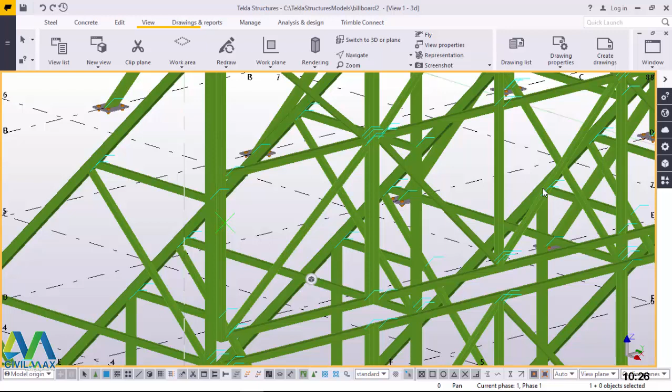Let me first of all highlight the canvas steel frame I'm talking about. This is what I'm talking about. This is what will be holding the advertising billboard.

Let me just select that. That's it, and this is what I'm talking about also. These are the canvas steel frames that will be held by these main supports, these ones here. I'll select that and bring it close so you can have a look.

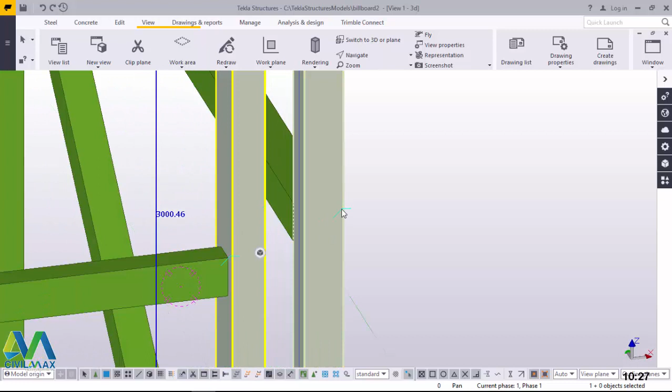So the connection we want to create, we want to create a connection between these two frames, so that this canvas steel frame can be held in place firmly, and to hold that message strongly to the people passing around any other billboard, so that they get the message from the advertising agency.

Now let me just turn this around so that we start creating the connection, connecting our steel frame to its main support. We'll get started right here, and I'll go straight to steel, click on steel, then come to beam, click on beam. Then I want to start creating my cleat, some sort of cleat here, and I'll go all the way to this part and snap on that spot.

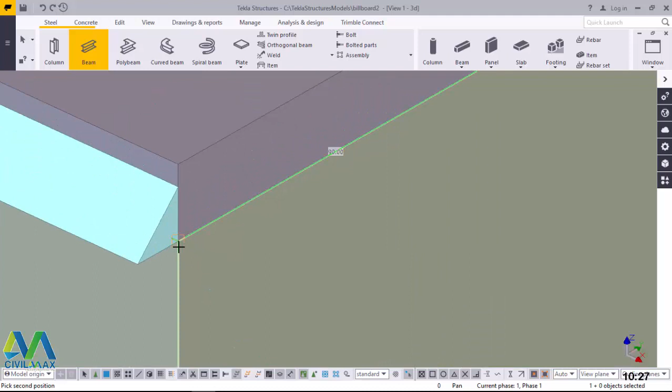Then right click and click interrupt to exit that command. Now I'll double click on this once again. I want to rotate it so that it sits well, so that it can also be welded properly against this member. Now to rotate it, I'll just come to this part.

Let me just scroll down and scroll up. I'll come straight here under position, then I'll click rotation, then I'll pick on back and click modify. That is not the best rotation that you want. I will click below and click modify. That's the position we want, but it's not the perfect way to do it.

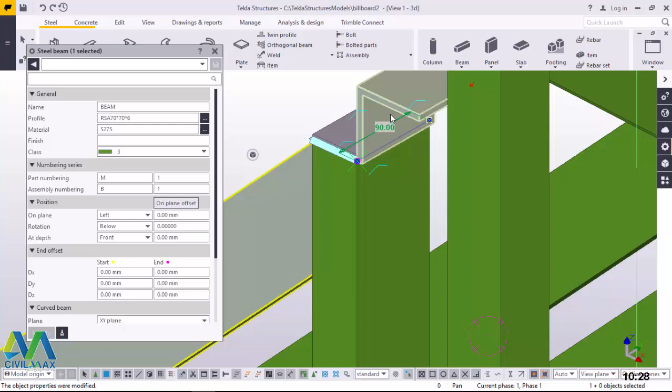Now I want to bring it slightly down, and to bring it down, I'll come to at depth and click behind here and click modify. That's it, it has moved to the position that you wanted it to move.

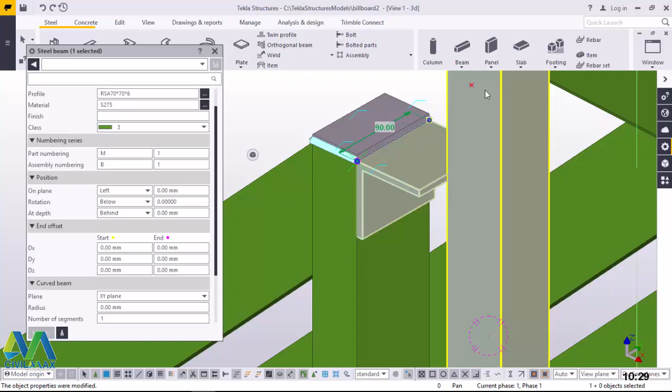Now again, I'll scroll because I want a bit of extension going this side, 50 millimeter, and the other way is 50 millimeter. To do that, I'll come to end offset. I want to offset this end by 50, and the other end also by 50, and I'll click modify. There's an extension there about 50 millimeter.

Then I'll click on empty screen to deselect that part. Then I'll press Control while holding my middle button on the mouse, and turn this model around.

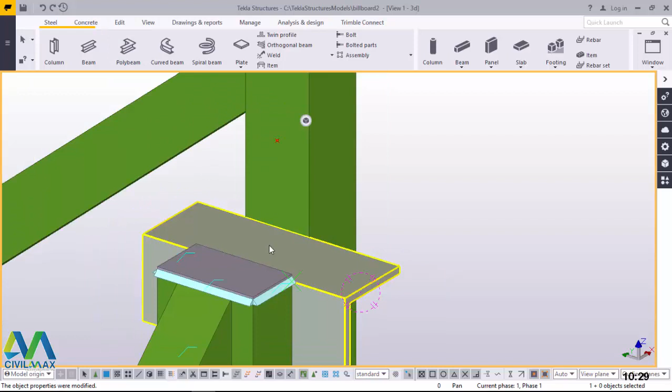Now we want to create another cleat here that will be moving all the way from this point to this point, and that cleat will be welded to this steel frame, and this one will be welded to this support, so that when you bring this, the canvas frame will just place it over here and bolt it.

I'll come back to steel beam, and I want to use this point all the way from that spot and go all the way to that end. That's it. And first of all, I've not shown you the size of this RSA.

Or angled profile. Now let me just turn this so that I double click on this and have a look at it. The size of this member is RSA 70 by 70, 6 millimeter thick.

I'll close that, and if you want to go back to profile catalog, just click on this radio button, and this will take you to profile catalog, and you'll be able to pick the appropriate one, or you can change this to another steel profile.

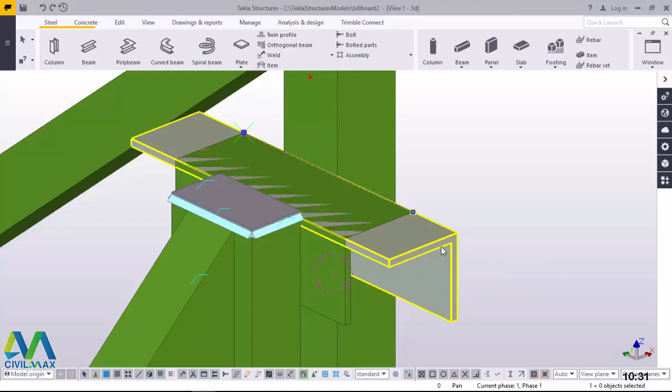Now I'll close that, and if you take a look, we have unnecessary extension of 50 here, and to rectify this, just double click on this and come all the way here and get rid of this. We just get rid of this and click modify, and once again it's not in the best position that we want it to be, so we'll move it slightly up.

I'll rotate it, and to do that we come here under position. Under position we'll work with these options: on plane, rotation, and at depth. Now we'll start with the rotation.

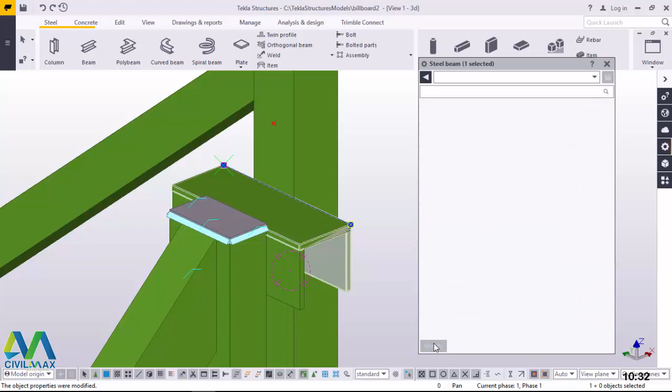I'll pick rotation and click back and click rotate, and that is not the best position. I'll click top and see how it locates itself. Not the best. I'll just come here and click below and click that. We are back where we were.

Now we'll just play with this until you get it to the right position. This is the best, slightly below the point that we are targeting it to be on. Now to bring it up here, we'll come to at depth and pick front and click right there.

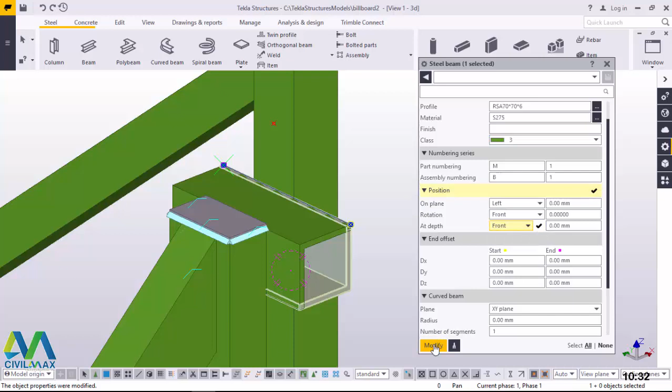There we are, it has moved up. Click on empty screen to deselect that part. Now I want to turn it around. I'll press Control while holding my middle button on the mouse and move my mouse like this. You can see I can rotate this comfortably.

What I want to do next is place my bolts. I want to connect this cleat to this cleat. This cleat will be welded to this canvas steel frame, and this cleat will be welded to this main support of the canvas steel frame.

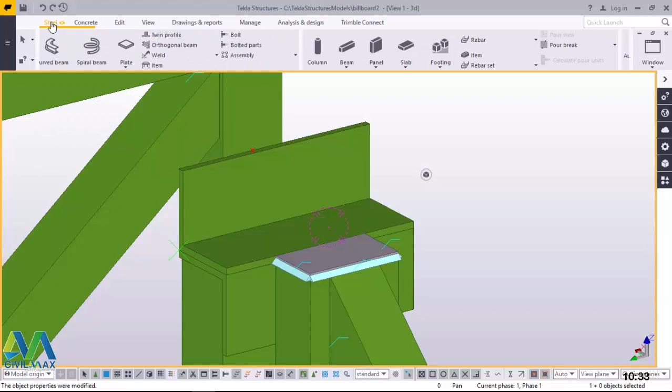Now the next point, I'll come to edit so that I can access the bolt command. It is not under edit, we can access that through Steel. If we click on Steel, we can access the bolt command right there. Then we select the parts that we want to bolt together.

I'll select that part and select this part. Now we want to place our bolt right at the middle here. If I mouse over this part, you cannot see any snaps. So to snap at the midpoint on one side of this cleat, I'll have to press the space bar on my keyboard. If I press the space bar and mouse over this, you can see now I can snap at the edge. Then I'll snap at the edge right there at the midpoint along that edge, and snap at the midpoint along this edge here. Then those are my bolts.

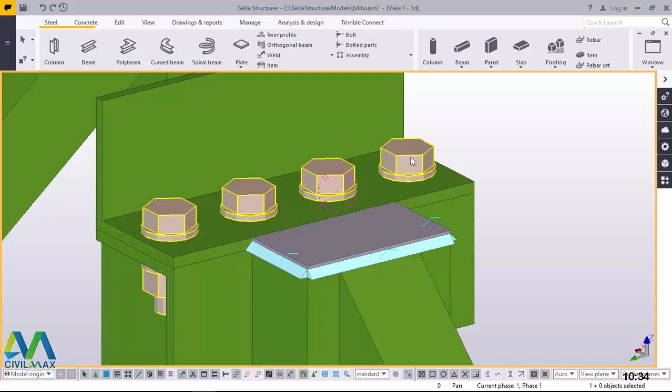Now to rectify or modify your bolts, just double click on the bolt. This will bring the bolt properties or bolt dialog box, and from here you'll be able to play around with what you want - if you want a washer, if you don't want a washer, if you want M20. Here I'm using M16.

If you want M20, you can pick M20 and click modify, and you can see the bolts change. I'll just take it back to M16. The standard also, you can pick whichever standard you want.

That's it. Also, if you want to play around with the spacing - remember we have 4 bolts, but here I've written 3. We always have 1 bolt at a default distance, so if you want 3 bolts, you just type 2 here. In this case I want to retain the 3 bolts, I'll change that to 2, and I'll have 3 bolts right there.

Let me just take it back to where it was. I want 4 bolts, so in that case I'll just type 3, because we have 1 already in place, and click modify so that we have that.

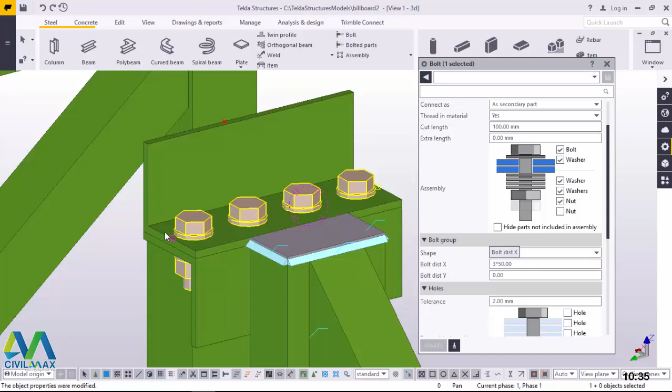This distance from the edge, you can play around with it. You can come down here at offset ends, and you can offset these from that edge maybe by 30. If you click modify, you'll see the bolts moving all the way from that end. You can add more - another offset of 50 - and you can see the bolts moving.

Now you can get rid of that offset and leave it at 0, and you see this is not what we wanted to do. Just retain that offset and click that, and that's it.

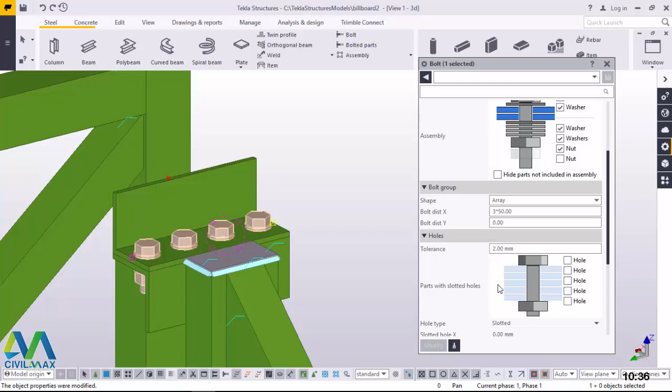Now let me just press Ctrl and turn this, and now I want to make this cleat part of this. What I'll do is click on this cleat, then right click and come to assembly and click on add to assembly. I'll add it to this assembly and click on that. Then do the same thing here - click on that cleat, right click, come to add to assembly, then add it to this assembly.

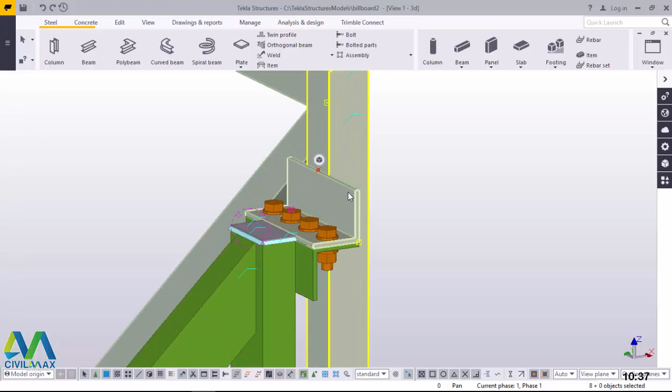Now to check whether this cleat has been welded to this steel frame, I'll press Alt and pick on this. You can see this cleat has been selected, and this one hasn't been selected because this one will not be welded together at the workshop and be brought to site together with this. This will be welded together to this, and this one will be welded together with this. So the assembly takes place at the site, or on site.

Then let me just turn this around, we check how it looks. Now I want to copy it right down to the other points. To do that, I'll press Ctrl and select that part. Let me first of all deselect what I don't want to pick.

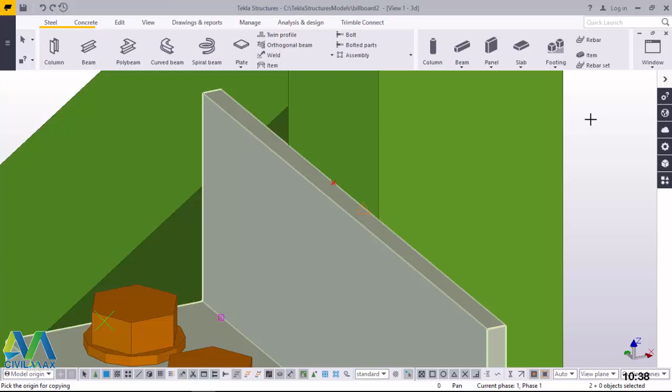I'll press that and press Ctrl, then press Ctrl again and turn this round. I want to copy this from this point. Right click and pick copy, and I want to pick it from this point. To locate this point is very easy. We come to Edit, then Points, pick Online Points, and snap right here. After enabling this button, snap here and snap here.

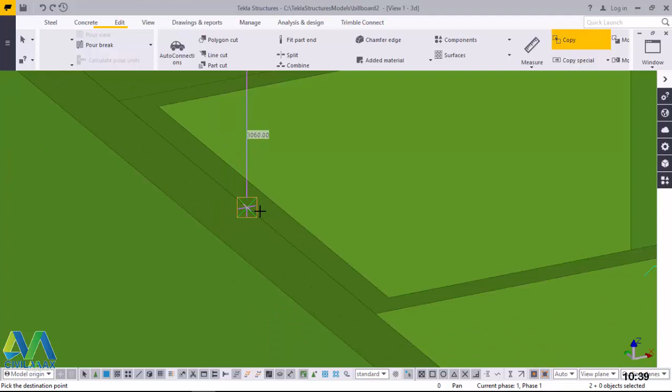You'll be able to locate the midpoint of this member, then pick it from that spot. In our case, that is already done, and I'll right click and exit, right click again and pick copy, then snap right there. I want to hold it from that spot, move all the way down here, and copy it right here. I want to create another connection right here. I'll create a connection right there. I have a connection right there, and if I press Ctrl and turn this round, you can see the connection already created perfectly.

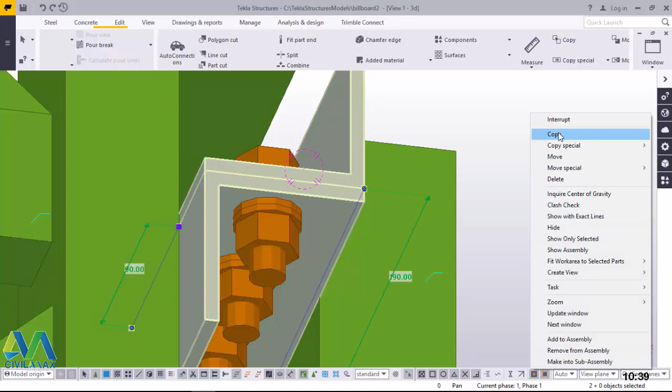Then what do we do next? We'll continue with this. I'll press Ctrl and pick on this. Then right click and come to copy, and I want to copy it at a point that will be accurate. I'll just snap right here, right there, and move it all the way up here, and turn this round and make sure I snap on the right spot. I'll snap right there. Perfect. But this is not the best location for our clip.

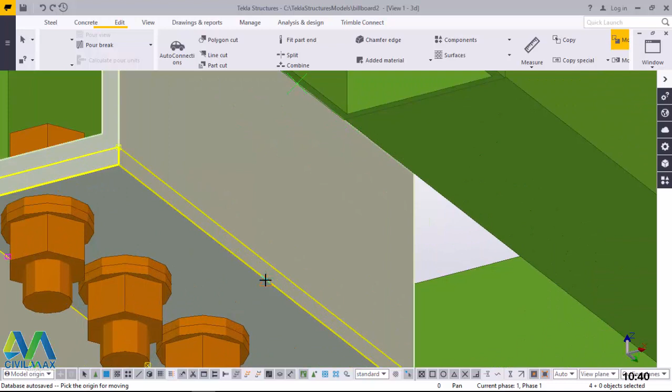To rectify that, just press Ctrl and select all this, then right click and come to Move. After clicking Move, give it some time to process that information. Then click right here on that spot and move all the way to this end and snap right here. Move all the way and snap right there. We have that in place, perfectly done.

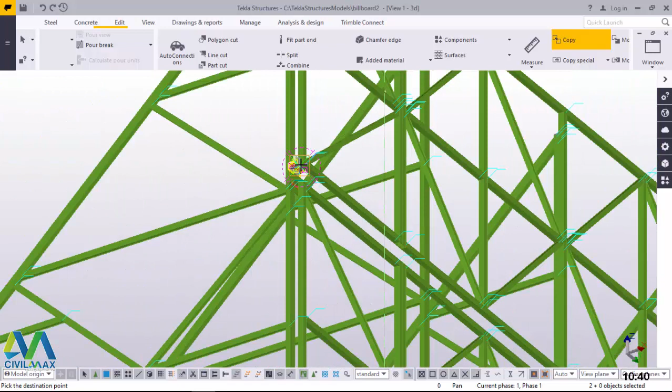Then come and press Ctrl, and we want to copy another one right at the bottom end. Click on that, pick on that, press Ctrl and pick on this, right click and come to copy, zoom out and bring and pick it from that spot, then zoom out, go all the way to the bottom end here. We come all the way to the bottom end here, and we want to place another one at the bottom end here on this frame. We'll copy it right there. Right click, and don't forget to save your work.

That is very important. Press Ctrl and hold the middle button on the mouse, and move your mouse like that while holding the Control button on the keyboard.

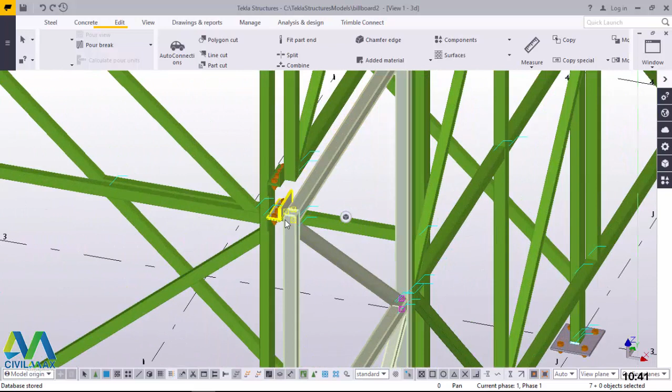Now we want to copy this to the middle here, to the middle of this frame. Let me just show you the frame I'm talking about. If I press Alt, you can see this has been welded to that, and this has been connected to that, and this has been connected to this. I'll deselect by clicking on empty screen.

Then I'll pick on this, press Control and pick on that. I'll right click and come to Special Copy. Then I'll click Linear. After clicking Linear, I want to move this all the way to the middle at a distance that we have to check first before effecting that copy command.

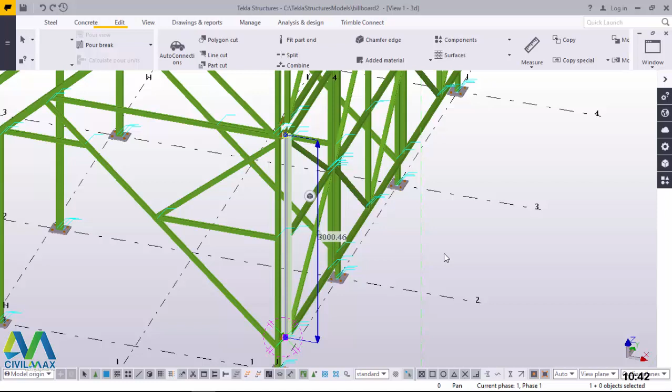Now we want to copy it at the midpoint along this member, and we don't know the distance. To check that, just click on this member, and you can see the length, or the dimension of this member. It is 3 meters.

So we'll come here, zoom close and pick on this, press Control and pick on this. Once you've done that, right click and come to Special Copy and pick on Linear. Then come to the axis. The reason we are picking on the axis is because it is pointing in the direction where we want to copy that part to. Now I've fed here 1.5, or 1500 millimeters. After doing that, I will not prefix this with a negative sign, because it is moving on a positive sign, so there's no need of prefixing our dimension with a negative sign. Now I'll just go ahead and click Copy, and you can see that moving all the way to this spot, exactly at the midpoint of this member.

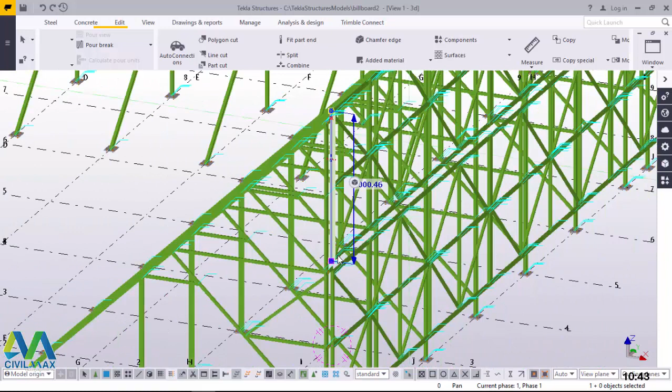That has been done. Then we'll go ahead and do the same thing here. We'll click on this and check the dimension. This is 3 meters. So we'll click on empty screen to deselect that part, press Control and select on this. Right click and come to Special Copy, and we'll click Linear Movement, or a Linear Copy. Then we'll just click and click OK, and that will be copied right here. So we have this in place.

We have this already connected. Now we want to do the same to the rest of our steel frame. So we'll start with this frame at the bottom end here.

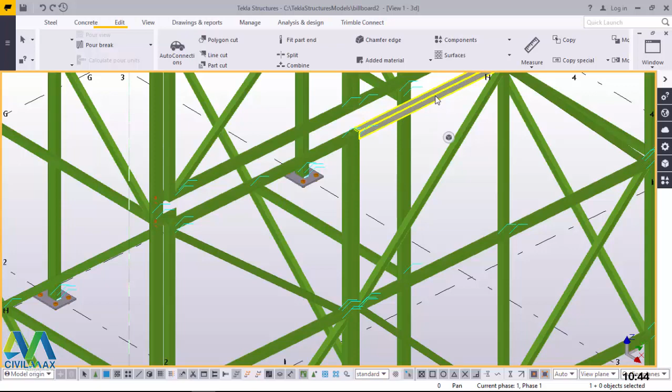I'll press Control and check. We'll start with this and go to that, and go to that and go to that. Bolted perfectly. Now let's get that done.

To do that, we'll just press Control and select on that, come all the way here, pick on this and pick on that, move at the bottom end here, pick on this, pick on that, pick on that. Then we'll right click and come to Copy.

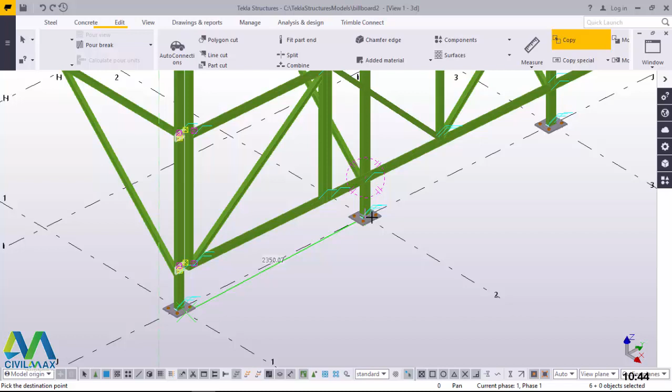Once you've done that, we'll carry that from this point, and we'll move to this point right here, and we'll snap right here. Once you've snapped on that spot and you want to check whether the connection has been created, you can just press Control and turn that round.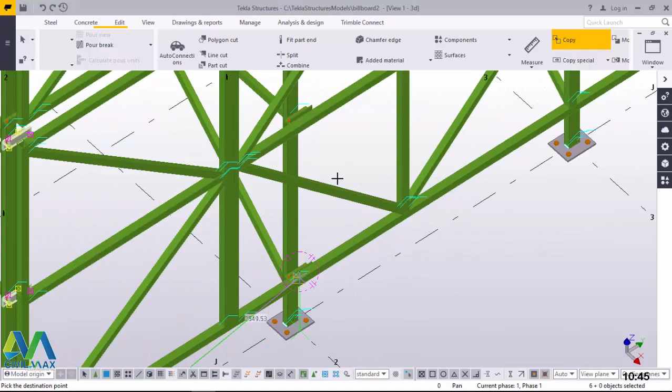You can be able to see your connection is right in the right position. And if you come up here, you can see that already welded perfectly well on that spot.

Though what we can do, we can move this slightly down, and that we can do just right now, so that our welding should be firm and be able to withstand the wind load that will be applied on our billboard steel frame.

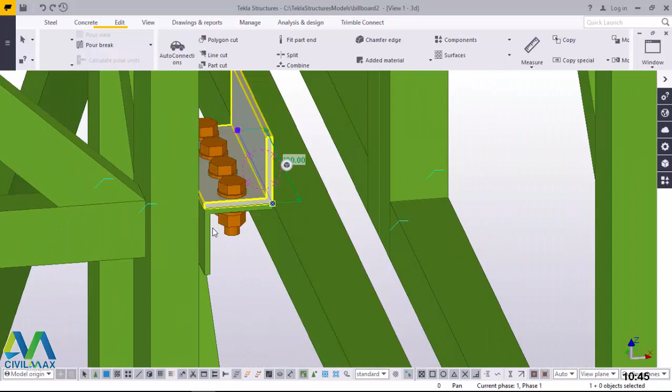Now if I turn this round, I can pick on this, press Control and pick on this. Once that has been done, press Control once again, so that we can drag this and place it right at this point. Right click that and come to Move.

Once you've done that, we want to move it from this point here to this point right at that spot. So that will hold our billboard steel frame firmly. See, that has been done perfectly.

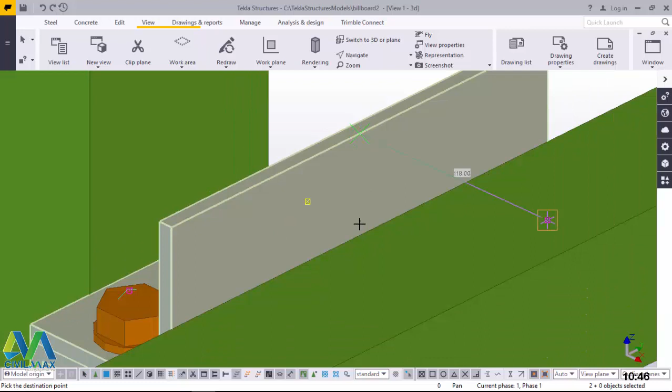Perfect. And if you come down here, we can do the same thing. We'll right click and pick on this and pick on that, and I will right click once again and click Move, come all the way here and snap on that, move all the way down here and place it right there. If we come here, we can do the same thing, but this member is big enough to accept or accommodate the amount of welding that will be applied here.

So the reason why we're moving that is because these members were slightly smaller, so much smaller to an extent that the welding points were almost non-existent.

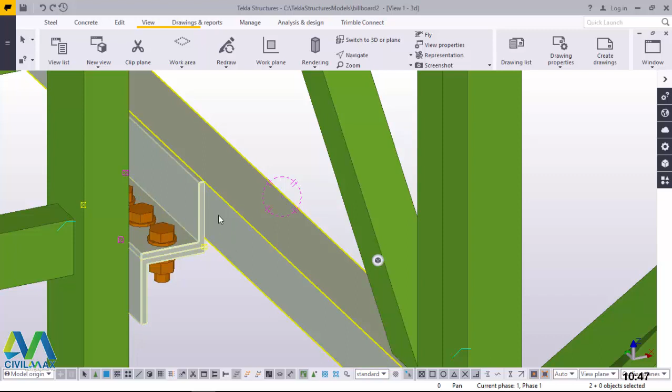Now if we move it down like this, we provide a surface area for welding, so we can weld this cleat to this member and weld it all around prior to drilling the holes for bolting. Now I'll turn this round like that, and we'll continue doing the same thing.

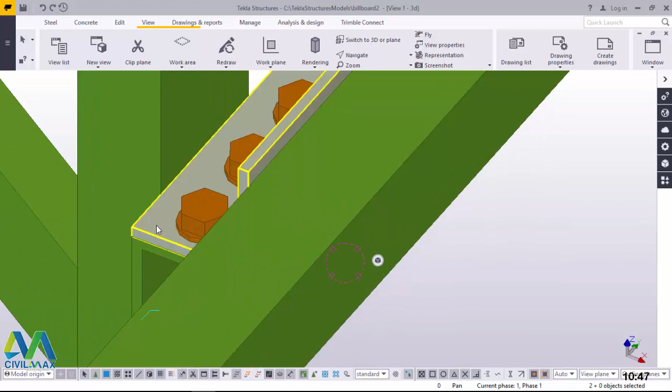We'll now copy this. We'll press Control, and I'll pick on that, and press Control and pick on that, and come all the way here and pick on this member. I'll pick on that and pick on this, then right click and come to Copy.

We've done that, and I will zoom out, and we want to pick it from this point here, from that point, and we'll move to this point here, move it to that point, and move all the way to this point.

Snap right there. Once we are done, we'll come over and check whether our connections are properly done, and we'll rectify if there's any case or if there's need to modify it further.

Now I'll snap right there and zoom out and target the other end and snap right here. Let me just snap right here. Perfect.

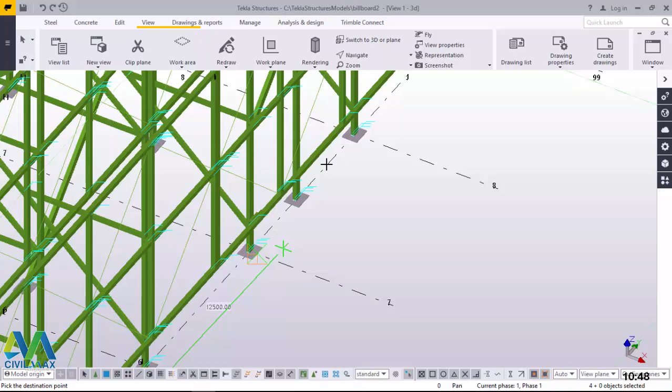And come all the way. Let me first of all check whether we placed a cleat there. We've not placed a cleat there, so let's place another one here. We'll move and place another one here.

Right there. Now if we press Control and turn this round, we can see our cleats are in place, and if you come up here, you can see our cleat is in place perfectly well done.

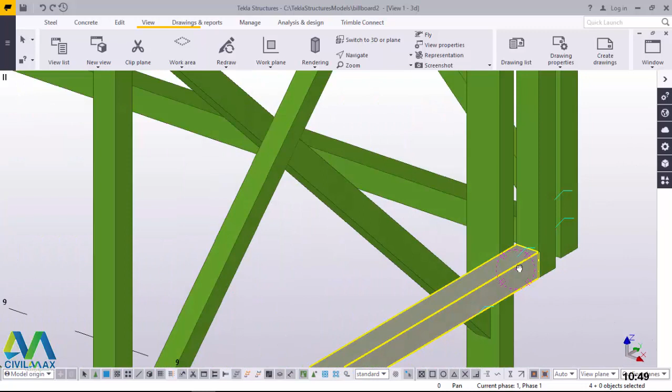And if you come this side, there is none, and that should not be a worry. We can come here and do the same thing.

We can come here and select on that, press Control and pick on that, and copy using the same approach. Then click on that and click copy.

Once you're done with that, we'll come and hold it right from the bottom end here. We'll hold it from that spot, and we'll move all the way to this end here, and we'll snap it right here.

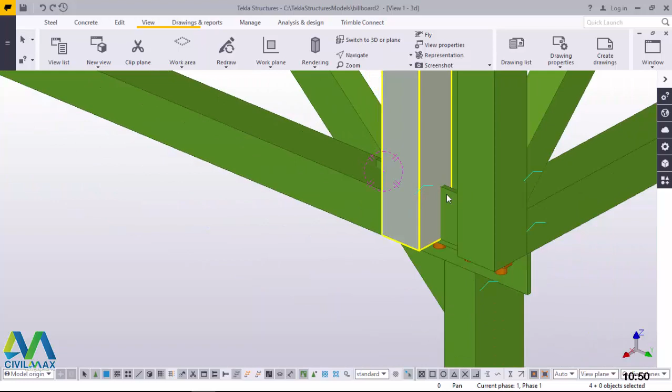Perfect. And check how it connects to these members. It's not coming out well. So at this point, we will change the size of our cleat.

Let's change the size of our cleat, and that will be done later on. First of all, let's complete this connection first.

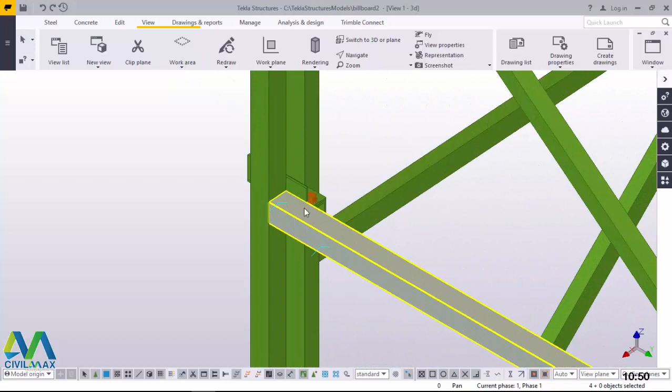Now we'll come at this point, and we'll click on this, select that while pressing the Control button, and come here and do the same thing. Press Control and turn this round, pick on this and that, right click and come to copy. Now we'll copy this.

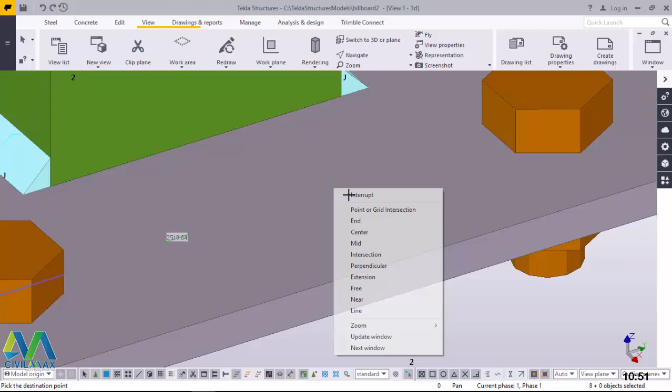We can see one here, a cleat here, well in place, and then the other one is not properly in place because that member has too much protrusion of this cleat. So we'll move it slightly down.

We'll press Ctrl and pick on that, then press Ctrl and turn that while holding our middle mouse button, then right click and come to move. Once you've come to move, pick a midpoint here and transfer that position at the bottom end here.

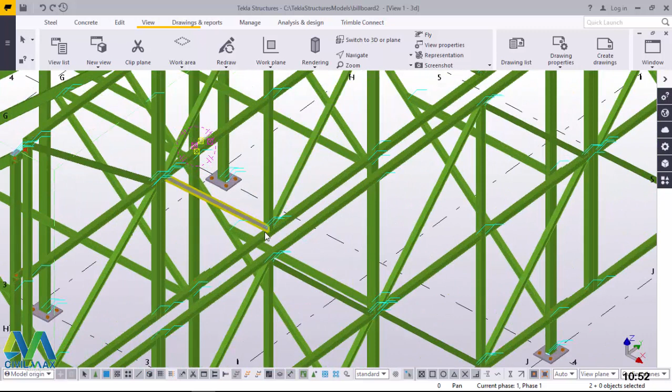Now, having done that, we want to pick this while pressing the Control button, right click and come to copy, and I'll zoom out. Once I've zoomed out, I want to copy the cleat from this position. It's straight, and I'll move it to this position here.

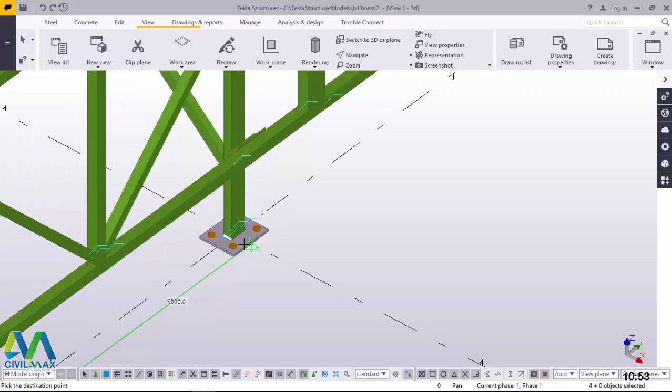I'll copy it right there and zoom out and copy it right here. I'll copy it and zoom out and take it all the way to the other end, to this end, and snap right there. Do the same thing to the other end and snap right here. Snap right there and come all the way and snap right here.

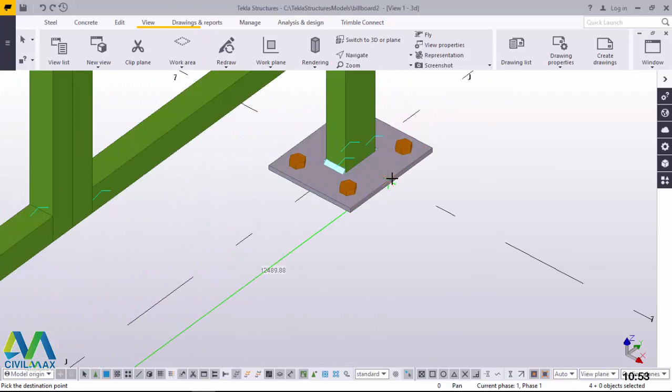Move up and snap right here, and come all the way and snap right here. This could be the last one, and this one is the point where we are expected to make some modification so that it meets our requirements.

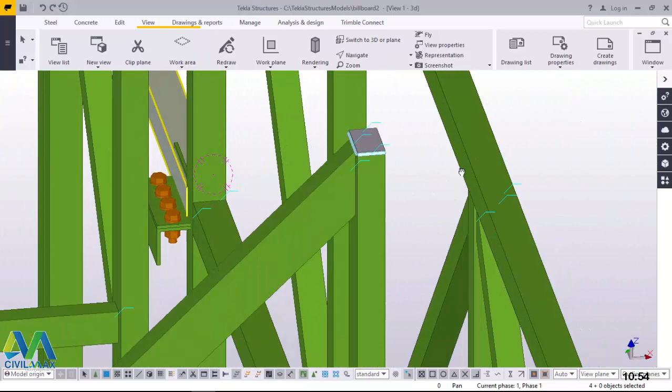Now, if we turn this round and come back where we were, you can see our connection right here. It's perfect. There it is, and that connection has been done. So if I turn that round, you can be able to see that perfectly well.

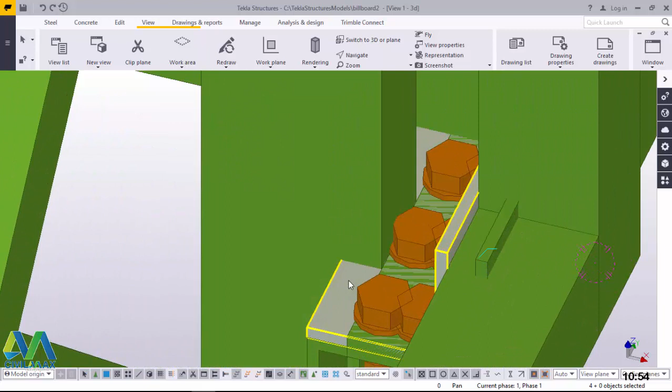So at this point, we'll change this. We'll delete this. Let me just turn round and turn this round. We'll delete that. We don't need any there.

Now what we'll do, we'll double click on this member so that we change the size, the steel profile here. Zoom out and click on that radio button, and this. After clicking this radio button under the beam properties dialog box, we'll come here and minimize that.

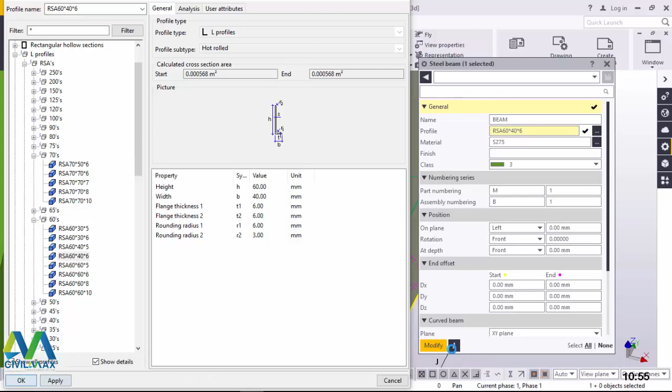We'll come to the L profile here. We want to change this to a smaller profile or member, to a 60 by 60 here, 60 by 60 by 30, 60 by 60 by 40, right there by 6 millimeter, and pick apply and accept that. We'll do the same thing here, apply, accept the modification.

That's it. Let's try first of all to see how this is positioning itself. There's still a protrusion, it's extending all the way to this end, and we don't need that. We'll go back to the profile catalog dialog box.

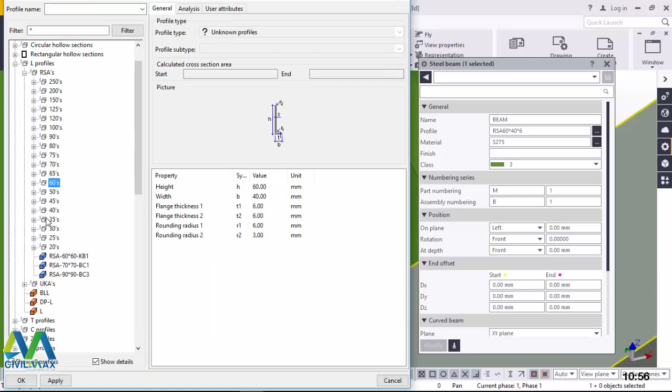We'll change that from 60 to 50. We'll come to 50 by 50 by 4 millimeter, or 50 by 50 by 6 millimeter. We will maintain the thickness of the cleats. I'll apply and give an OK right there, then come here and accept the modification by clicking modify, and that's it.

That is the best position, and I will do the same thing to this. Double click on this, then come here and click this radio button under beam properties dialog box, and this will take you straight to the profile catalog. From there you'll be able to pick the appropriate or better size of steel of your preference.

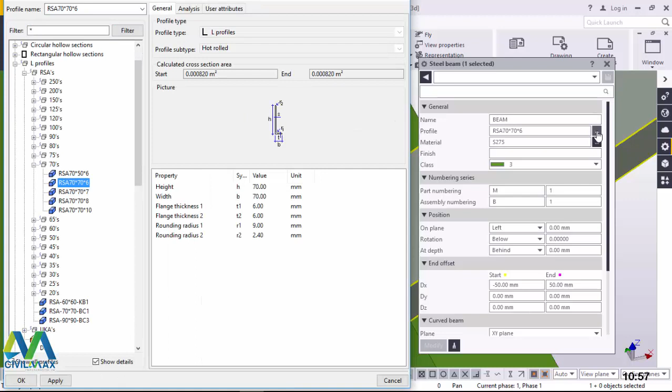We'll come to 70 by 70 L profile, 70 by 70 by 6 millimeter thick, and apply that, accepting by clicking OK. Then click modify, which means accepting the modification. Click modify, and it's not the best way we want this to be.

I'll turn that around. You can see still there's a slight protrusion. If you click on this and check, there's an unwanted member right there.

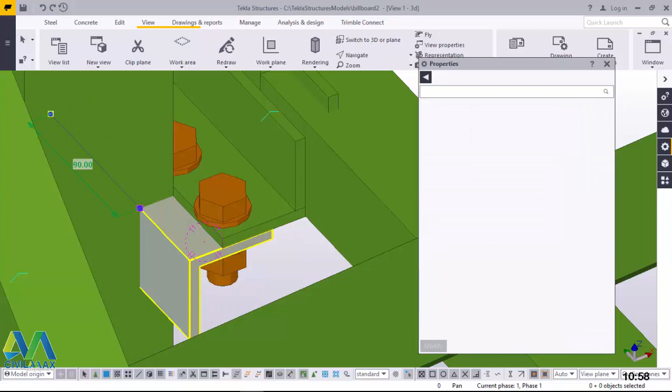We'll delete that by double clicking on it, or come straight here and change the position by clicking right, then click modify. That's not the best position, so we'll try moving it. We'll give it a middle position and see how it moves. Still not the best, so we'll click left.

It has moved left, but by how much do we want that to move? We can feed some dimension right there to make it move slightly. Giving it another 20, and it has moved.

Now what we want to play around with is the bolts. We want to change the bolts here. We double click on the bolt, and we want to shift this bolt slightly to the midpoint. How do we do that? We'll scroll this down and come to this position, rotation, not rotation.

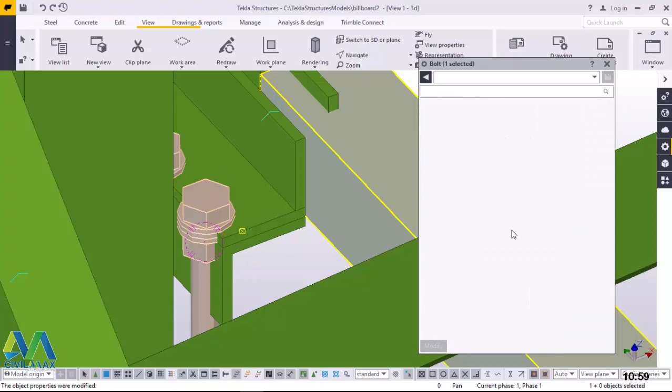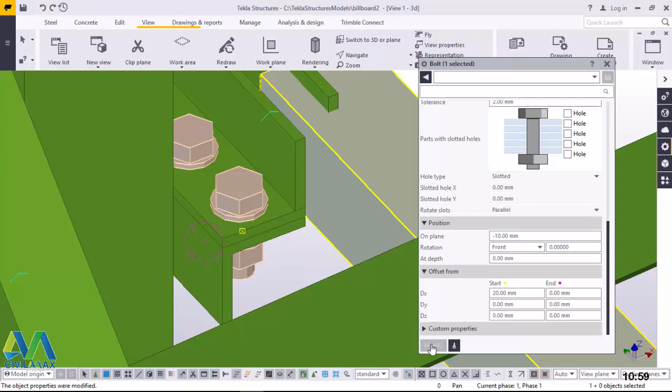Change that to 10. That is the best position, and we can leave it there. Don't forget to save your work so you don't repeat the same thing. I'll accept that by closing, clicking on empty screen, then come here again and save that work.

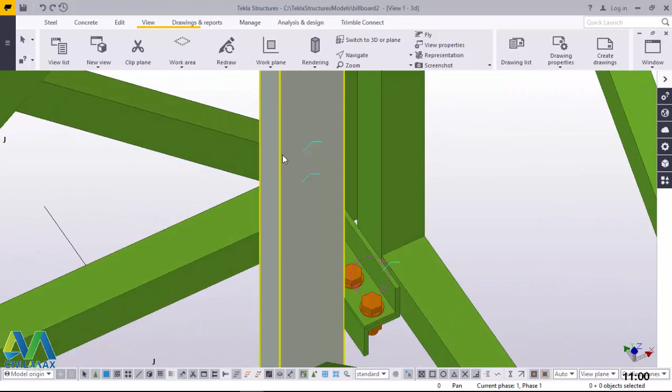Press Ctrl and turn this round. But still you can see some unwanted member, a protrusion, a foreign member here that we don't want in that position. We can delete that. That was our previous cleat that was way too big for this position, because we changed the orientation of this member.

So instead of this side facing this end, we've shifted it that way. Now we can take it back up here by deleting this. We can delete all that. We press Ctrl and delete that, press Ctrl and delete that, deleting everything that we don't want.

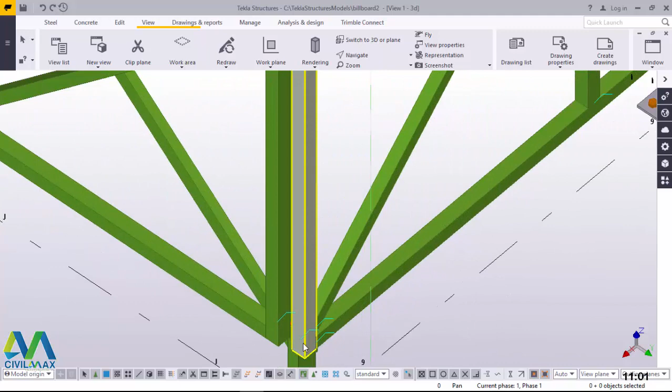Then turn that round. So this is the cleat that we've just made right now, and it's also taking the part. It has extended itself to a position that we don't really want it to go to. So we'll trim this end slightly to not collide with or touch this part of the frame.

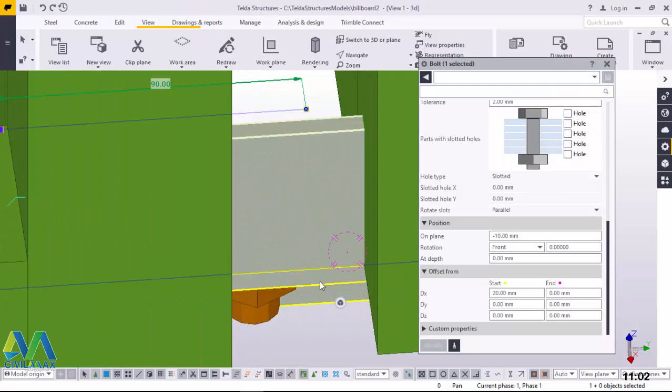To do that, just click rotate, and we'll click these two members, double click on that, then come all the way here. First we'll change this to 0, change all these to 50, and click copy. That's not the best option.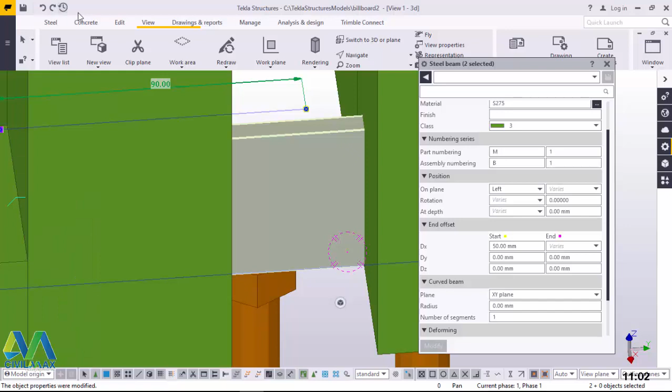That is not the best option. Double click on the first one. Once done, come here and click on this, prefix that dimension by either 50. You want to shorten that, click modify. Check whether it has shortened, turn that round, and it has done that, but not the best way.

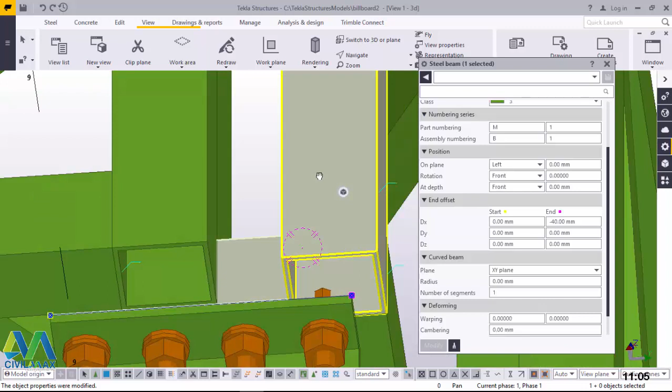Increase that offset by 40, and click that to check if it's come to a position of our choice. I'll press Ctrl while holding my middle mouse button. This is still not the best position, still not bad. First, prior to moving further, we have to recheck our boltings, the bolt. Let me turn that round, and I'll continue shortening this by 50.

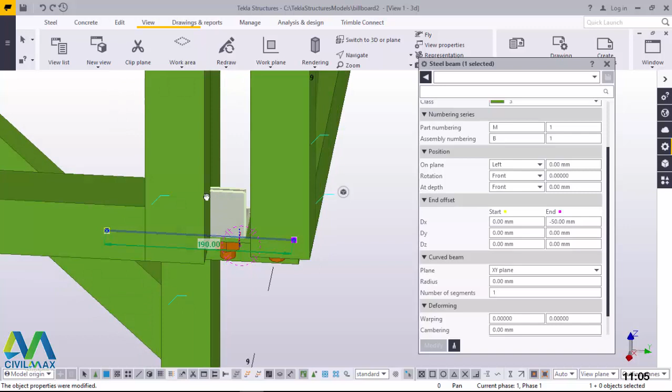Like that, click modify, and that's okay. That is okay. I'll turn that round, and there it is. There we have our cleat in place. I'll close that, click on empty screen, and we have our cleat in place.

Now, having shown you that, that is how you connect the canvas steel frame to its main support. I'll leave that to you to go and try it out. The next step we want to do is brace our main support, attaching them to each other so that they can counter extreme wind loads, because it will be exposed to so much wind pressure.

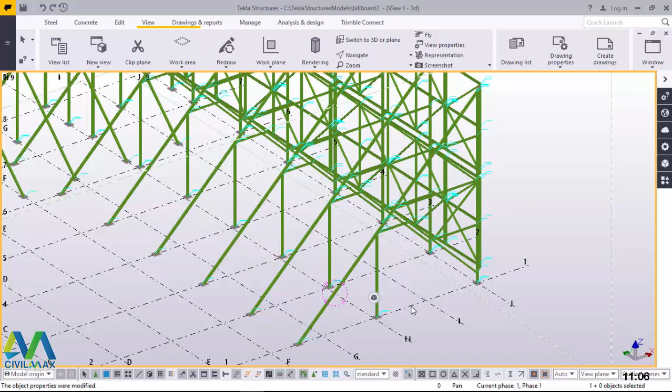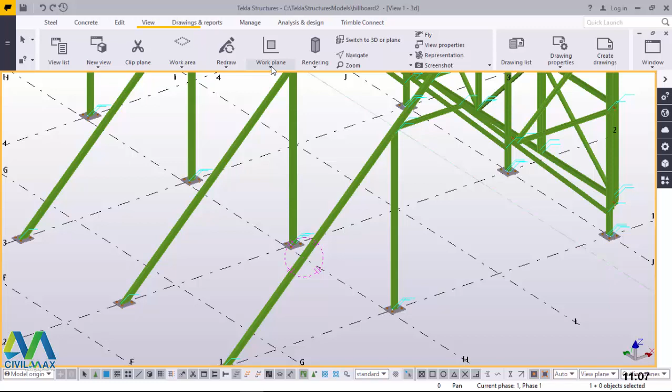Now I'll come here and click on steel and pick on that, and I want to create a connection right from this spot. Prior to doing that, we have to change the orientation of our XYZ plane. To change the position of our XYZ plane, we'll come to the work plane tool, pick on the first option, and align our work plane tool with that slope. Right click and interrupt to exit from that work plane tool.

Then we'll come back to steel again and pick on the steel member here, and we'll snap right here, right on that spot, and right on this spot right here, right there.

We'll double click on that to do away with these offsets, and click modify.

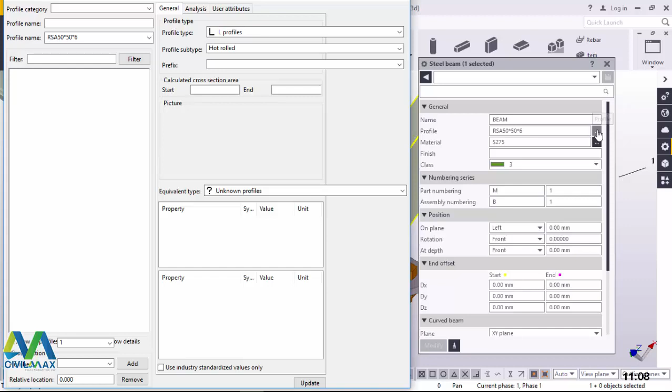Once that is done, we want to use square hollow sections to support these main supports of the canvas steel frame. We'll come all the way to general, where we'll get the profile and pick on that radio button so we can go back to the profile catalog and pick on the appropriate steel member or square hollow section we want, and give it some time to load so we can pick on it.

Here we are, and I can minimize this L profile, then come all the way to a square hollow section here. This is rectangular hollow section, but inside it we have the SHS square hollow section, and you can go right there and pick one. We can pick on 60 by 60, 3 millimeter thick, and pick on that and come here and click modify.

Once that has been done, we want to slightly move it down. To do that, we'll come to at depth here and click middle. We want to shift it right to the middle, but it's not really touching the middle point we want it to go to.

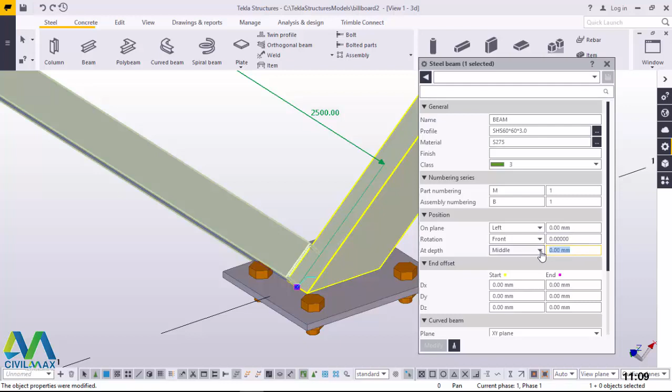We can add some dimensions there by clicking 20, move it slightly by 20 - not the best. Prefix that by a negative sign, and move it once again, just give it 30. That will be okay, and we'll move it right there.

After doing that, we'll right click once again, and we want to shift it slightly off that base plate, and we'll click linear. Prior to doing that, we check the position or direction of the axis we want to copy these to. We want to copy this along the x-axis.

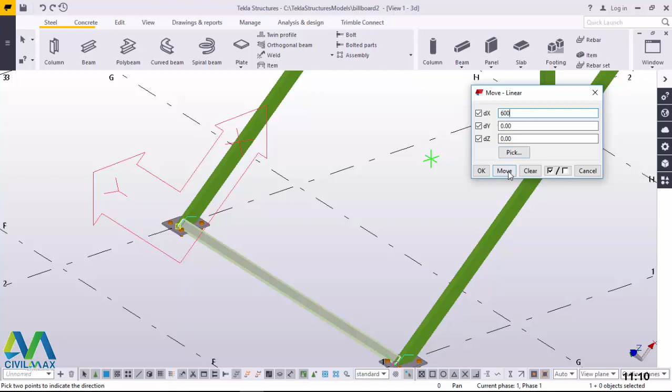So on the x-axis, we'll feed an offset there of maybe 600 right there. We'll click move - it will move by 600. Now from that 600, we want to populate this along the x-axis, to copy a number of these along this.

Here we'll change the copy distance. We'll add 1 meter, or 1.2 - that is not right, we are moving this.

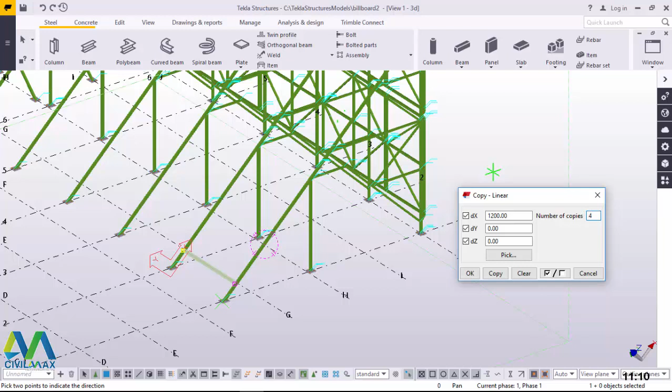We'll change our command by right clicking and coming to copy special, click linear, and change this from z-axis to x-axis. We want 1.2, and we want several of these, maybe 6 or 4. Let's try 4 and click OK.

Click OK, right click, and if you come to copy and turn this round, you can see how many we have. We have this in place.

We can pick on that, right click and come to special copy and click linear. We can add 3 there, zoom out and click 3. That's perfect. Click OK, right click, and that's all.

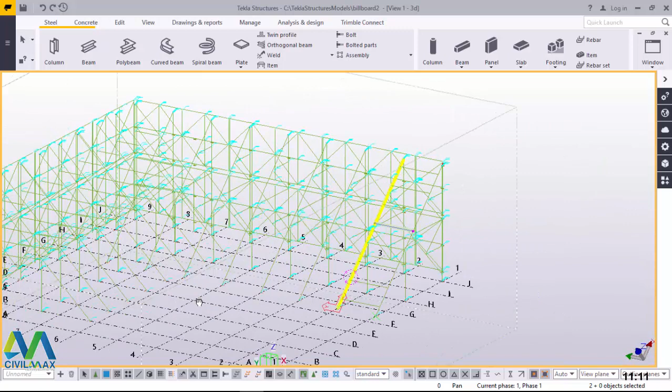Close that and press Ctrl and turn this round. So what we'll do is select on each individual one, select on that, and select on this. Once you select on that, we'll select on this, select on that.

Remember, this will be done on site. The welding - these supports will be done on site.

Click on that, right click and come to copy. Now we want to copy this from this point. We will jump one and place another one here, then jump this and place another one here. Perfect, there we are.

So if you turn this round, you can be able to see what we've actually done.

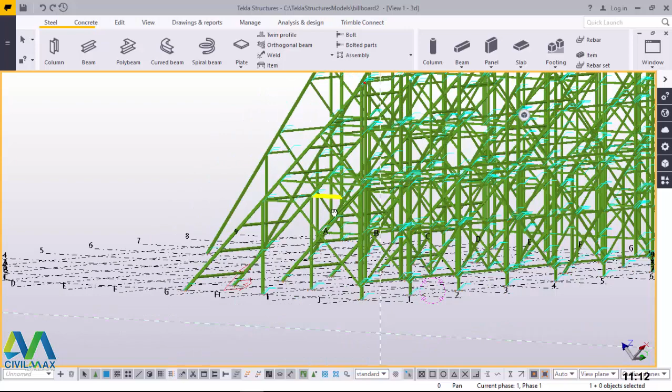Let's meet then - the next presentation will be generating drawings for this particular billboard, and we'll be able to share this with you. So let me just bring this close so you see what we've done so far.

This is what I wanted to share with you, to show you how you can do that if you're not familiar so much with Tekla Structures and how its commands work, or how to use its commands and the macros.

If I turn that, you can see the clips that we've just placed right now.